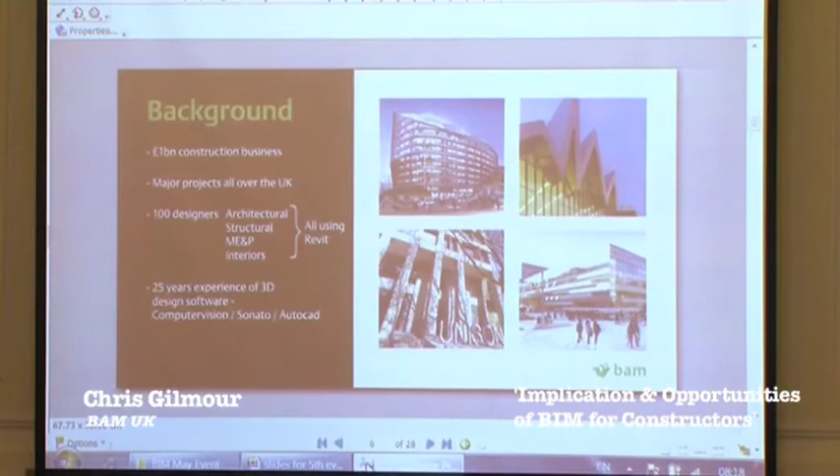The interesting thing that makes us a little different is we have our own designers. Once upon a time we had 200 designers ourselves. We're now down to about 100. That's architects, structure, MEP, interiors. They're all using Revit. We've been using Revit architecture for about 10 years now, and we migrated to MEP about 2 years ago. So we're pretty well experienced in the use of 3D technology, and that's given us a bit of a boost in terms of trying to understand what BIM's about.

At the moment, just to give you a picture of where we are as a business, we have 7 regions. The country's split up into 7 regions, Scotland down to the southwest. Every region is using BIM in some way, shape or form. Some are leading, some are evangelists and doing a lot, others are just waking up and following. So we're at different places around the country.

But we've set some targets, and the targets we've set last year is that at least one project should be fully in BIM. This year, 30% of all of the projects that we're doing have to be in BIM, and then we move on to 2013, 60% and so on.

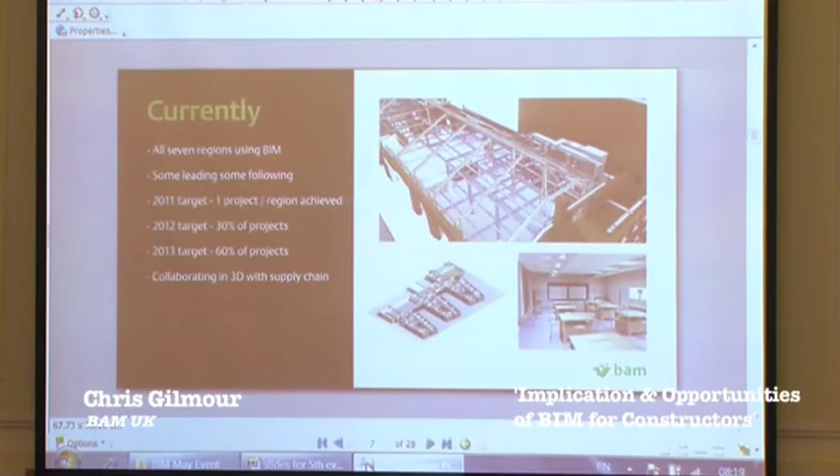Pictures on the right are just some examples of the sort of things that we do. I'm sure most of you recognise the style. The one at the bottom right is quite interesting. That's a construction model in Revit of a technology classroom in a school. We build a lot of schools. And we use the technology to explain the design of the school and the classroom to the teachers. So when we're engaging with the head teacher, we'll produce these sort of models and then talk to them about how the classroom is laid out. The technology allows us to zoom around, but actually it's not just Hollywood BIM, as we call it. That's a real construction model if we wanted to strip away all of the rendering.

Why are we doing all of this? It's a simple business case, really. If you read a lot, and I'm sure of you have, about what's happening in the States, there's some pretty good research that says on every project in the States, every week there is a clash of something. And that clash costs the contractor probably $2,500. So when you multiply it up by the number of projects that you do and the number of weeks in a year, it comes to 8 million for us. That's a pretty big number. Now you can discount that by whatever figure you like, discount it by 90%. It's still a big number.

We're being pushed by government. Government are saying to us that 18 months ago, within 5 years, every project has to be in BIM. So if you want to work in the public sector in the UK, you have to be in BIM. There is no alternative. That's a pretty big driver for us. We're also saying that contractors need to be the integrators, and I'll come on to that a bit more in a minute. It needs strong client leadership.

And as I said right at the beginning, this industry needs something to change it. We are a very wasteful industry. We all know that, we all recognise it. But this industry has not changed in the last 100 years. We do things more efficiently and technology helps us a little bit. But in terms of the processes and the collaboration, the way we put things together, we haven't changed. This is the opportunity to change the industry. And I think for those that are doing it and for those that want to get into BIM, there's probably a 2 or 3 year window to gain some competitive advantage. After that, our view is everybody will be doing it and it will just be business as usual.

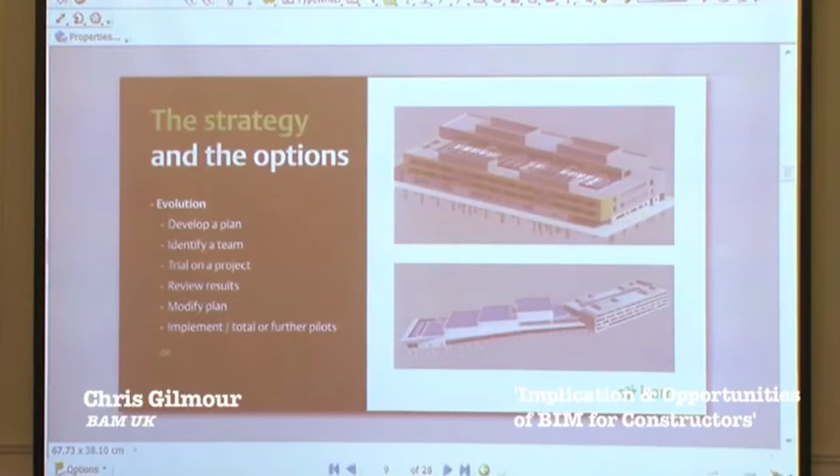We did not want to pilot it. We didn't want evolution, which was quite unusual for us. So we just said, let's just get on and do it, because in the end, we have to make the decision to do it.

So 12 months ago, we said we needed to get on and do it. We established a BIM steering group, which I chair, with all of our regions represented, plus some representatives from Autodesk to help us. We've run through some training programs. We're committed to invest - probably about £2.5 million over the next 3 years on software, consultancy and training. We're just getting on with it, and we're learning every day that goes by.

What have we been doing? We talk about a manufacturing model. Even when we get an architect's model, a structural engineer's model, an MEP engineer's model, and try to put them together using Navisworks as the integrator, that's still only the design model. We don't build the design model, we build what we call a manufacturing model. So the essence for us is to get our supply chain, who are going to build, to create their particular subcontract package - steel, precast - in 3D, and we take out the design model and put back the manufacturing model, because that's actually what we're going to build.

We're resolving clashes in the model. We're using 4D a lot in terms of logistics and modelling. We're timelining projects and showing clients exactly where we're programmed to be on week 25, and we look out the site window and say, yes, we're on program, or hopefully a bit ahead, and hopefully never behind, but we are sometimes. It gives us an actual visual image of where we're supposed to be.

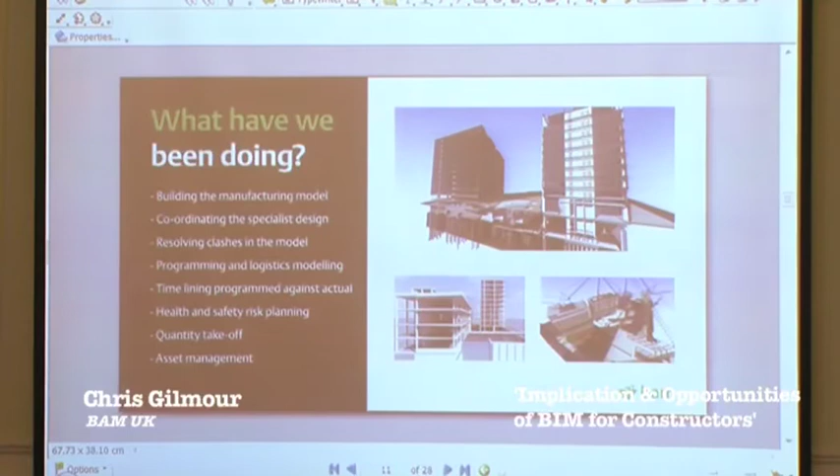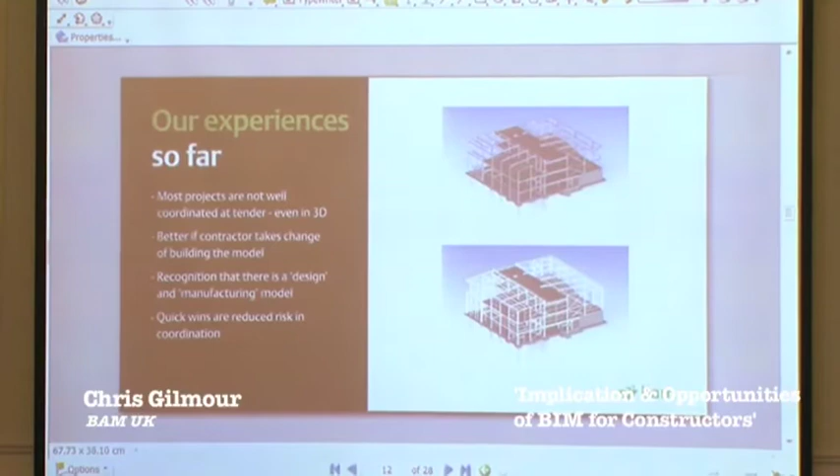Our experiences so far: most projects aren't coordinated when we get them at tender, even in 3D. We might get 3 different models, and you probably wouldn't be amazed that they're not coordinated. It's better if the contractor takes charge of building the model. I mentioned that contractors need to be the integrators. We firmly believe that. We think that whilst architects are responsible for an element of design coordination, when it comes down to the finer detail, the contractor has to take charge.

There's all sorts of debates about intellectual property, and the lawyers are having a field day, but we're just getting on with it - recognition that it's a design and a manufacturing model.

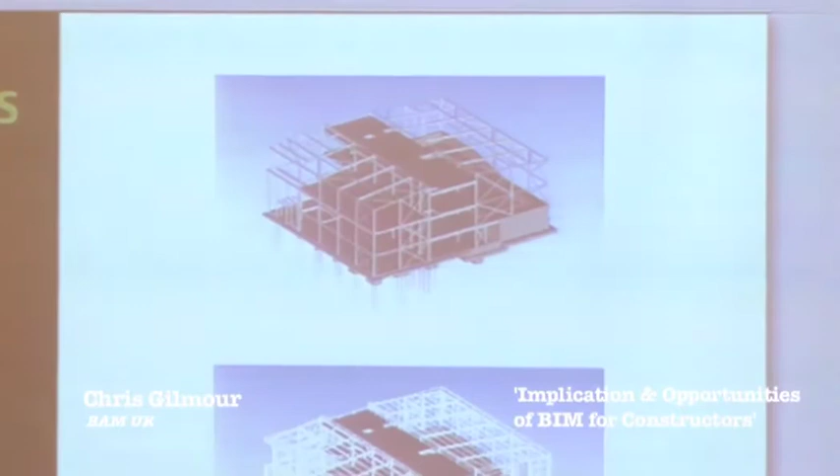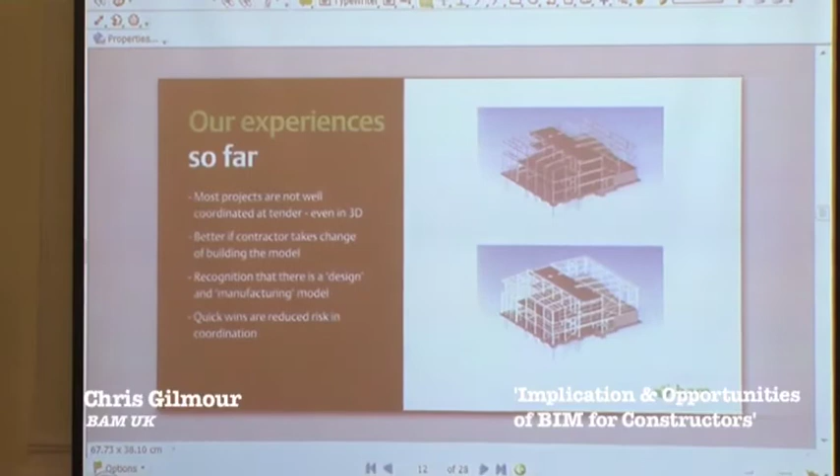Those 2 pictures up there are of a small leisure centre we're doing in Scotland. The top is the design model, and the bottom is the manufacturing model - that's the manufacturers, not Fisher's, but another subcontractor's manufacturing model. That's the bit we're interested in. We're not really interested in the design model, because we don't build that. And then we're getting some quick wins and reduced risk in coordination.

And there's more. There's a lot of rhetoric talked by some. I was talking to my colleagues yesterday - because we're Dutch, we're quite conservative actually, we don't tend to shout about ourselves too much. We prefer to do something, and then when somebody asks us how we do that, we show them. There's a lot of talk about BIM and what people are doing. Just ask them the question and ask them to show you what they're doing and turn the pages. We find, sorry to say this, but subcontractors are more enthusiastic than designers.

In the UK, we did a straw poll of all of the consultants we're working with, and we found only 20% of them - this is about 6 months ago, so hopefully things have moved on - are working in some way in 3D. So I expect that to change pretty quickly.

So, case study. It's okay talking, but what are we actually doing? This is Leeds Arena, which the other guys will talk to you about as well. It's a 12,000 seat arena in Leeds, does pop concerts, you can see. We won it on a two-stage design and build contract. We bid against a number of others. It's about 60 million. We won it in April 2010 as the first stage.

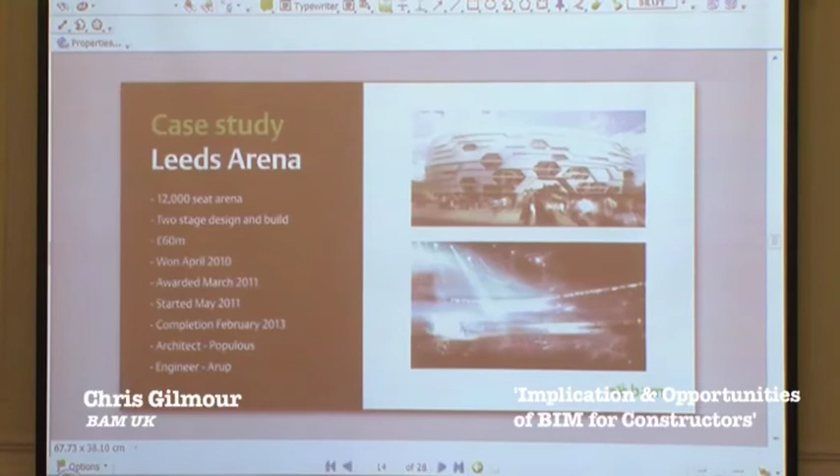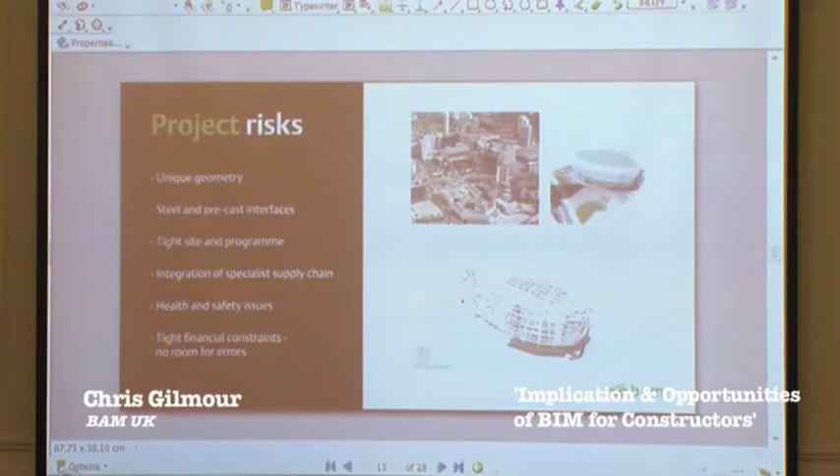It's unique geometry, lots of steel and precast interfaces. It's a tight site and program - right in the middle of Leeds, difficult to get to. Lots of integration of specialist supply chain, lots of working at height, so lots of health and safety issues for us, and tight financial constraints. Contractors in the room will know what I mean by that.

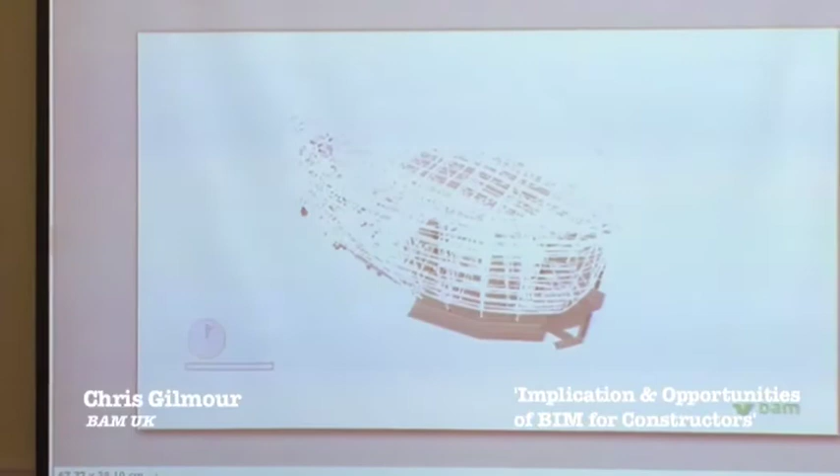We won this at a pretty tight margin, where there is no room for errors. So we don't want any more problems on site, which is going to cost us money coming out of our pocket. That's a picture of the steel frame, I'm sure - might be a better one later on.

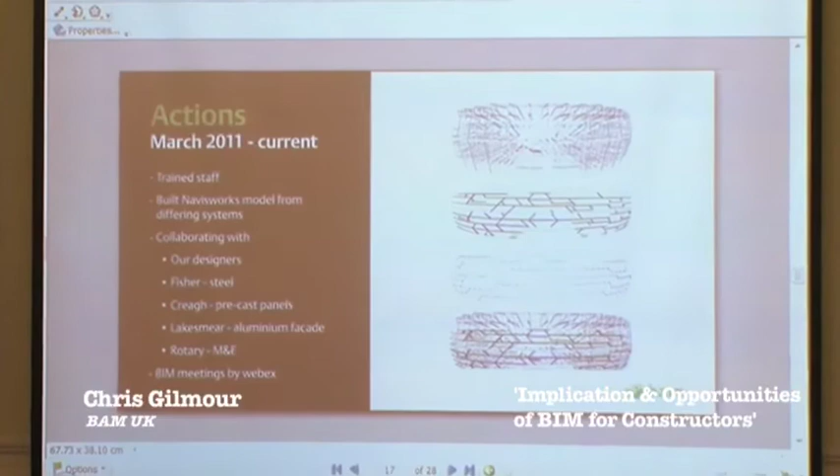So, having won the project, having spent a year developing the design, just about to start on site, it was fortuitous, I guess - it was the same time that as a business we pressed the button and said, okay, we're going to roll BIM out. So this was probably the first project we got stuck into.

We trained some staff, some design management staff on the project. The guy who runs it, the design manager, was trained on Navisworks. Took him not long - he's not a graduate from Cambridge in IT. He's an ex-bricklayer. He came up through the trades, became a site manager, and then moved into design management. So he's not a techie person, but he manages all of this.

We built the Navisworks model from the differing consultants' designs. We collaborated with the designers - Fishers, Creagh, Lakesmere doing the aluminium facade, and Rotary doing the M&E. And we run our meetings by WebEx, so people don't travel. Fishers and Creagh are in Northern Ireland, the job's in Leeds, our architects are in London, Arup are in Sheffield. Nobody travels to the site. Site team are on site. It's all done on screen and from people's offices.

The benefits to us are a greater understanding of the building. In the first week of putting this model together, we found 62 clashes. Having spent a year developing the design with our designers, 62 clashes in the first 4 weeks, which we reckon came out about £100,000 of money that we would have had to spend.